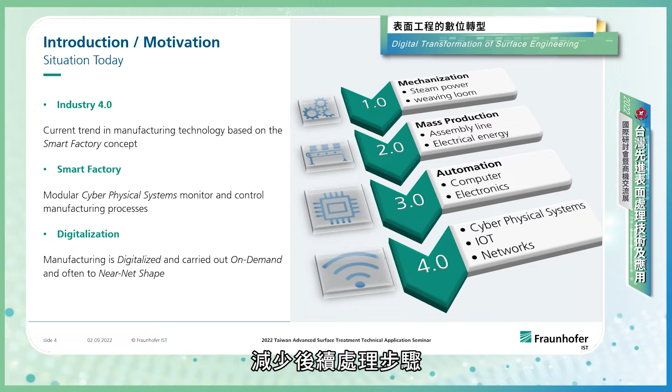How can we improve our manufacturing? How can we move to lean manufacturing? I would like to just quickly go through the 7 wastes of lean manufacturing. The waste is overproduction. We produce too much. We have to keep stock of all the material. We have huge warehouses that we need. There's a lot of transportation and movement between different places. We need people that access or process material or information.

We might have to wait on previous steps, on parts. We have to deal with defects. We have to sort out errors and mistakes and correct the problem, reduce and optimize. And we have to deal with overprocessing. All those aspects we can minimize, and then we can increase the added value and maximize the value. So removing waste adds value and improves the productivity.

What we want is to bridge the digital gap. We want to draw benefits from digitalization. We want to better utilize the assets that we have. We want to reduce dependency on tacit knowledge in manufacturing, in production. We want to reduce time and costs that are linked to product verification. We want to have on-site, in-situ quality control and verification.

We want to improve or visualize all the business metrics like yield, cost, delivery quality, equipment effectiveness, and so on. We want to enable and improve design for manufacturing and be flexible to act on new business opportunities. We want to build on a framework for developing a resilient business. We were talking about digital transformation.

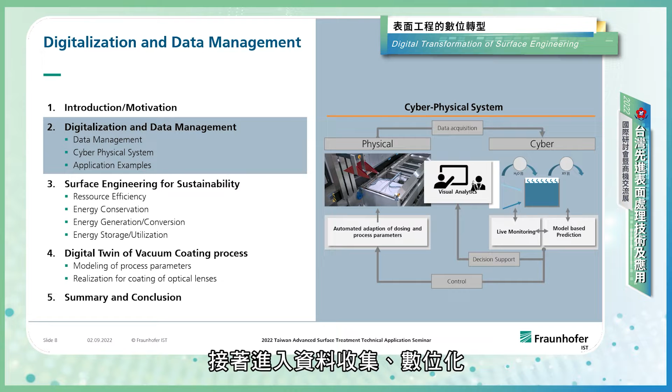And digital transformation is more addressing the mindset, bringing in the human factor, involving the human in the situation. Digital transformation is an approach to problem solving through technology. It's more about the people and their mindset than it is about the technology. It's using the latest, emerging technologies to build business. Collecting all the data, addressing aspects of digitalization and data management.

If we have a product, if we have a process or production line, we have our part, we have material that's moving within the plant between different steps. We have, for example, a pre-treatment that's creating a report. The next step would be a modification or a coating of our part, and then we do some quality analysis and we characterize the outcome.

We have different reporting, and the human is moving between the different steps and brings the information together and is correlating the parameters. But what we want to have is we want to follow the material flow and collect the data. So within the different steps, different kinds of information are generated in different file formats. Maybe we have structured data which is coming from the PLC, which are automatically generated files by the different systems themselves or relational databases. We have unstructured data like communication by mails, protocols with text editors, spreadsheets, and so on.

And the goal is to get all the information from the different processing steps, from the different sources into our database, to use some logging for the different processes, to use the information that we can access and bring it in the database to use, for example, AI, artificial intelligence, to feed back, to control the processes. We can visualize the results, we can analyze the results, and we can put it into simulation and modeling.

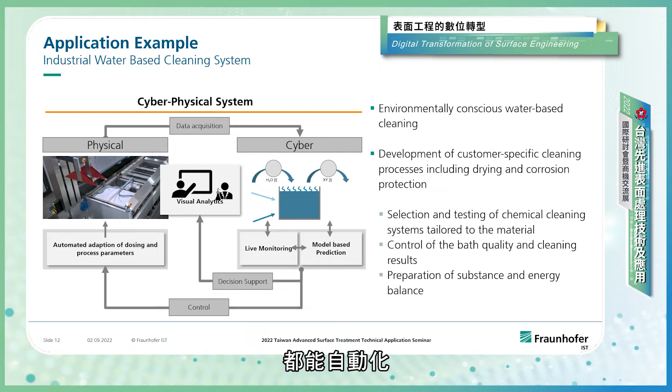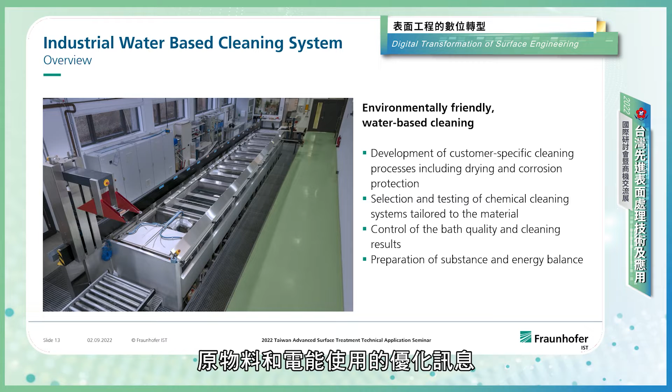This is a picture of our cleaning line with the different process steps that we have. And what we want is to develop a customer-specific cleaning process, including drying and corrosion protection. It's important to select and test the chemical cleaning system tailored to the specific material we are dealing with, and we want to supervise, we want to control the bath quality and the cleaning results, and we get information, we can prepare substance and energy balances and also get information about our CO2 footprint.

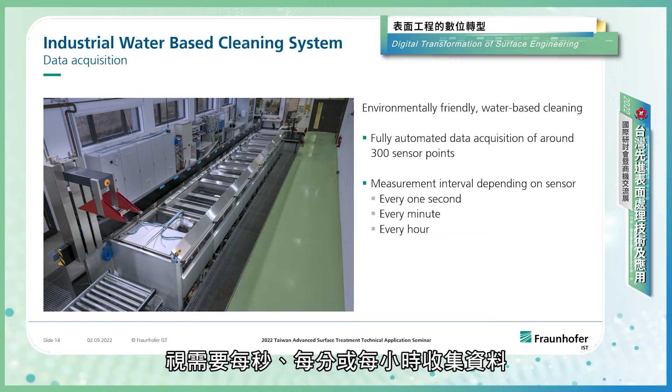In our system, it's a fully automated data acquisition with approximately 300 sensor points, and the measurement interval depends on the individual sensor, on the individual situation, and will be collected every second, every minute, or every hour as it is relevant or desired. This gives an overview of the dashboard on all the different stations in the system that we can monitor. We can see trends, we can see the development, and you get a broad picture of your process. And then you can zoom in.

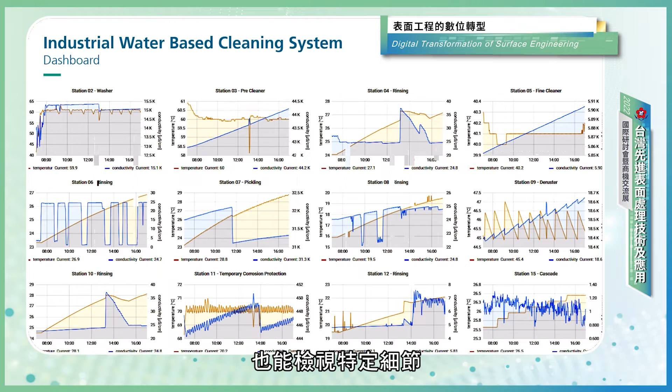Here you can see the temperature change when we enter with a massive part which is warm into a bath. We can see when we are entering the bath that we increase the temperature. There's a jump in the temperature because the part is heating up the bath to some extent, exchanging the temperature between the bath, the surrounding environment, and the part itself. And also it's influencing the conductivity of our cleaning solution itself.

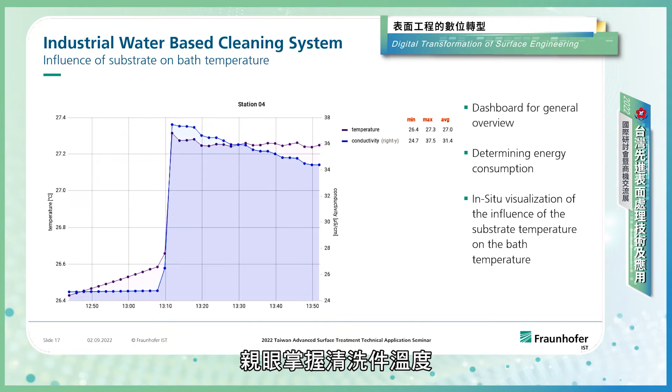And that's quite sensitive because this gives information on the cleaning agents, whether we have to recalibrate or to add some cleaning agents, but it's also depending on the temperature. So you can see directly the interaction between the baths in the process, and we get an in situ visualization of the influence of the substrate temperature of the bath on the bath temperature.

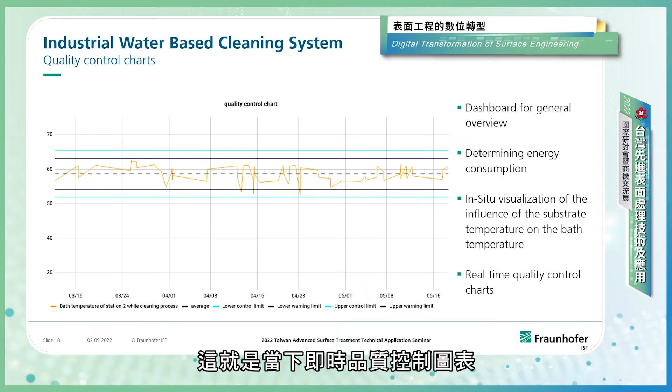We get quality control sheets on the long term. Here you can see an example over a period of 2 months, and you can see the energy consumption, determining the energy consumption. We can see the bath temperature. We have a corridor we want to keep in. We have a lower and an upper warning limit, and we have a control limit of our process, and we want to keep our process within a given boundary. And we have access to real-time quality control charts in that situation.

If you don't have new equipment that already has all the data, you also can retrofit existing equipment. So like we did with a coating system, a vacuum coating system that's shown here, we added some sensors, and we want to upgrade the system to get access to machine information, process information, and to get correlations between the process parameters and what's happening with the product, with the coating itself. So we want to correlate the production parameters with the coating properties finally.

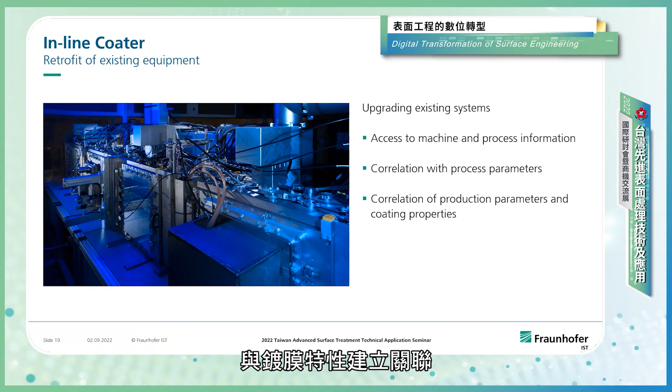One example here is for a given power. So we are operating in constant power. You can see on the plateau levels, there's a constant power set, increased in different steps, and the power was kept constant, and we are monitoring current and voltage. And what we can see are some of the overshoots here. This is some arcing of the process, some undesired events that we can see. We can monitor, we can trace back, and also correlate if there is some failure, if there are some issues in the coating.

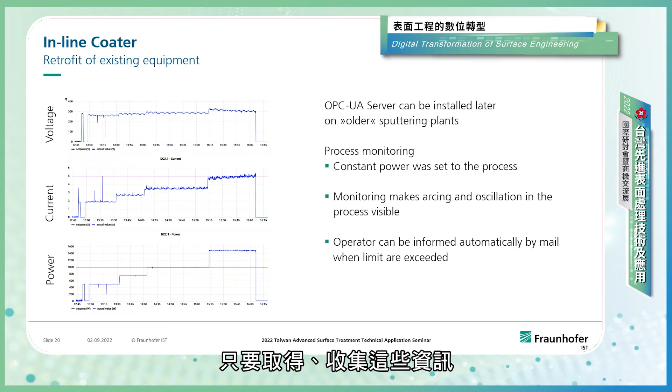Furthermore, you can see some oscillations on top of that, which is correlated to substrate movement, since our coating source is a cylindrical cathode, a tube that is rotating, and if there is uneven rotation, you see some deviation in the current and voltage signal. All this information you get, and you can collect it and improve your process with that.

A third example would be retrofitting older equipment. Quite often you have, for example, some analytical tools. In our case, we had a vibrating sample magnetometer to characterize magnetic properties of coatings, and we don't have access with that system to our intranet due to some security issues, and we can't handle the data directly. We are using a reverse proxy server that provides a web page to upload the data. So we have a spreadsheet, we can create some interface where we can upload the data, and this looks like the following.

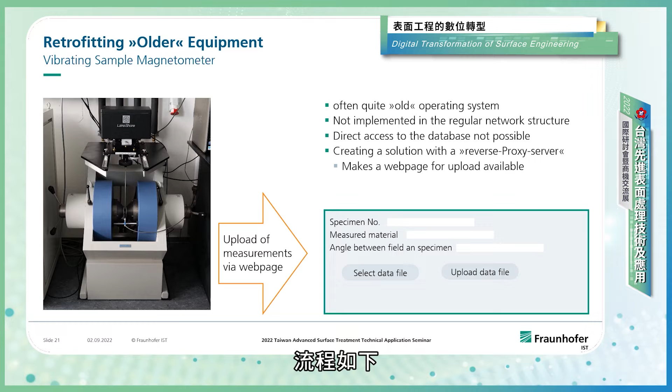We have an isolated system, our measurement tool with maybe an old program, an old computer, and then we have a small single board computer with an operating system that's always up to date and is used as a reverse proxy server. And by that single board computer, we can upload the data into our database in the intranet without running into conflict with any security protocols in our institute or in our production environment.

From our analytical system now, we get our measurement data, we get it via our reverse proxy, and we put it into our intranet, import the data into the database, and then we can convert it and read out the values, the physical values and the properties of our system.

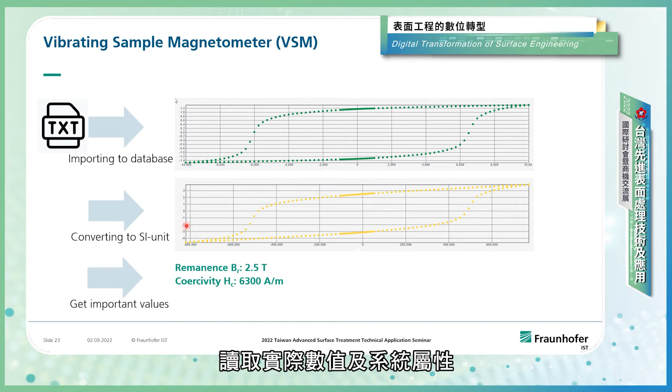We also can use other tools like Excel or other sheets and have some masks to get access to the database to read out specific data of our processes and our production, and then we can learn from this, correlate the data, put it into some algorithms and further improve and feed back to the system. And with artificial intelligence, we can run into a self-learning or improved situation, for example.

How can surface engineering contribute to sustainability? Coatings can significantly contribute to sustainability and efficiency. For example, addressing resource efficiency. We can conserve scarce material since we are only applying the material on the surface or the part of the surface of our product where it is really needed rather than costly bulk material.

We can address issues like energy efficiency. We can reduce energy, for example, in transportation by using low friction coatings, by reduction of friction, in aviation by erosion protection or thermal barrier coatings in gas turbines. And we can become and be environmentally friendly. We reduce toxic effluents, try to avoid critical chemicals and expensive disposal.

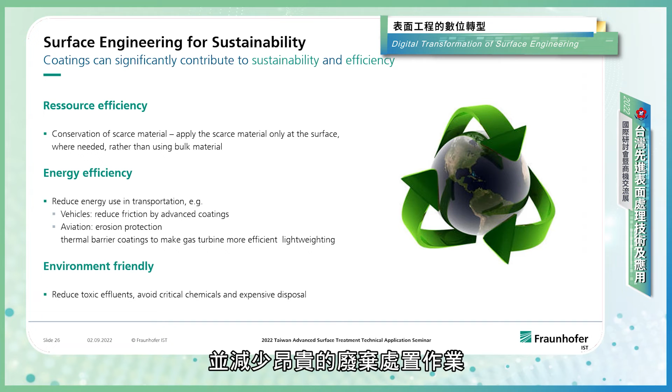In surface engineering or in vacuum processes, we are using thin film functional coatings only where it's needed. So we have only a small amount, a significantly reduced amount of material we're using. We try to substitute scarce or precious material. We have just thin films instead of massive parts, or substituting gold contacts, massive copper, and we go to a

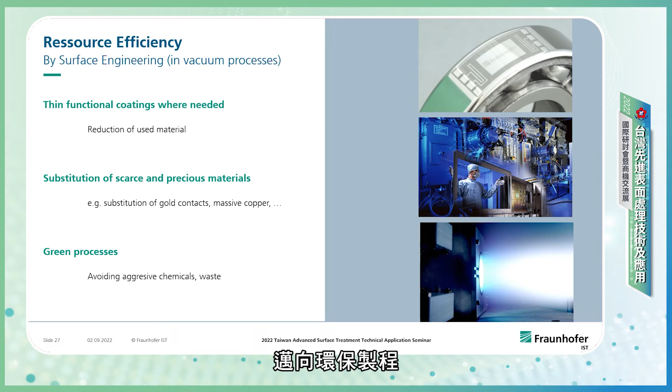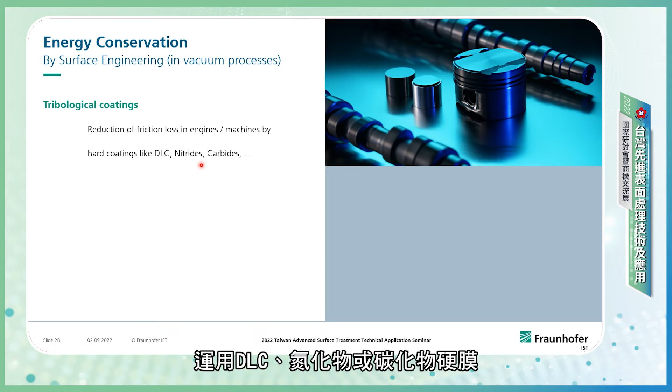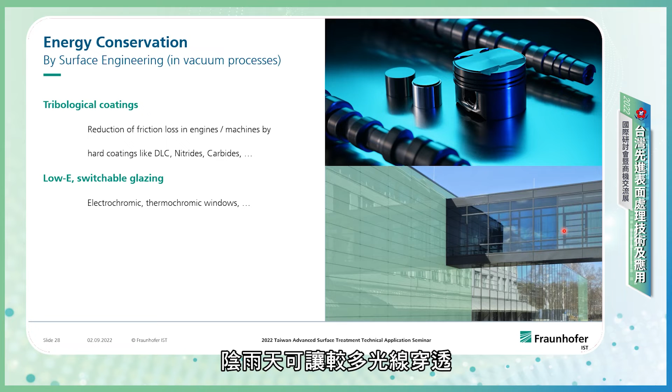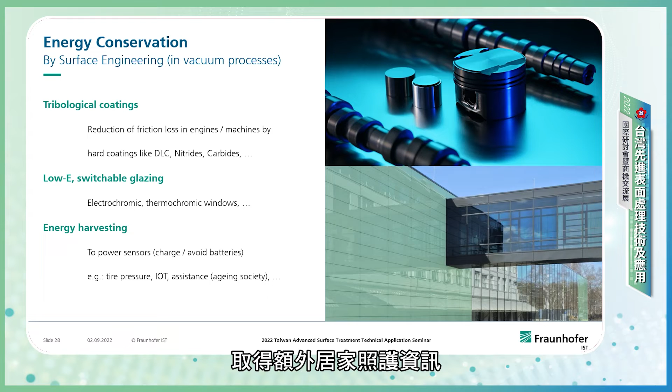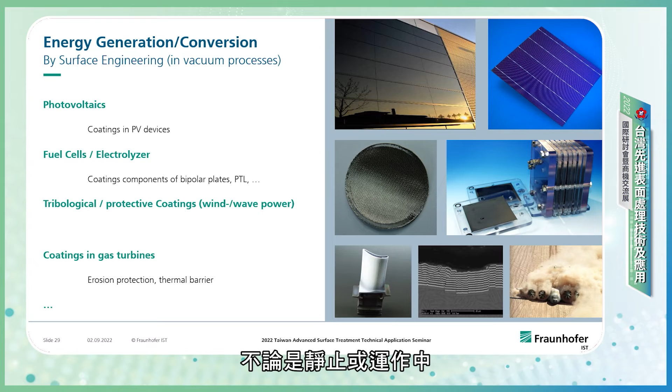We can generate or convert energy, like in photovoltaics with solar cells, in fuel cells, electrolyzers, having bipolar plates, coating of bipolar plates, porous transport layers, tribological or protective coatings, for example, for wind or wave power, in gas turbines, whether in stationary or mobile turbines, like erosion protection or thermal barriers.

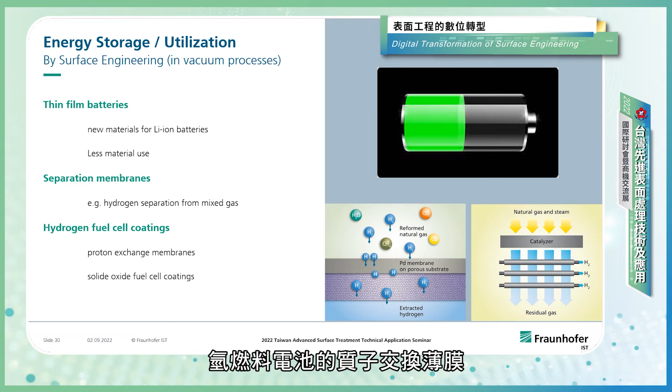We can store or utilize energy in thin film batteries to have new materials or less material use than in thick film approaches, to use separation membranes, for example, for the extraction of high purity hydrogen from mixed gases, or in hydrogen fuel cells, coatings for proton exchange membranes or solid oxide fuel cells.

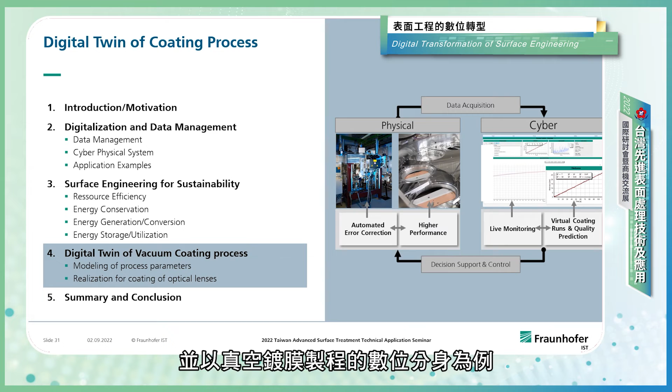And with that, I would like to combine aspects on the surface engineering and the digital data and the modeling in an example of a digital twin of a vacuum coating process. There are several simulation or modeling tools available in thin film technology. We have different kinds of material models, process models, and they are quite complex. So they consume a lot of time. Here somewhere is given the real-time limit. If we want to have a digital twin, we need real-time models. We need something that's acting in real time and giving the input.

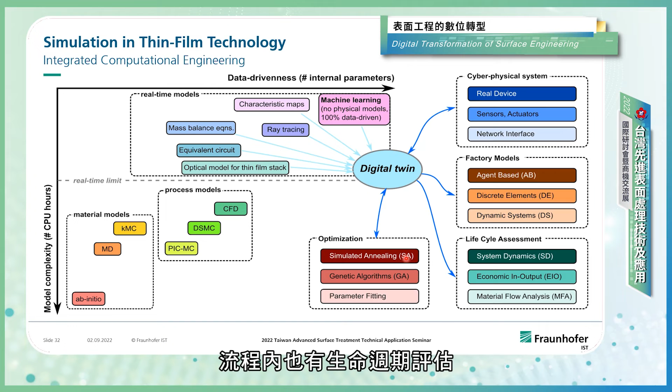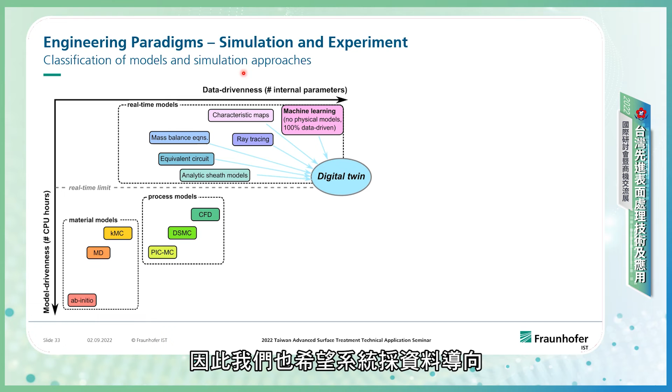We have cyber-physical systems that are connected with the digital twin. We have the real device, sensors, actuators. We have factory models that are connected. We have the life cycle assessment, and we have optimization in our process. Classification of models and simulation approaches that we have, like mentioned before. If it's model drivenness, we have a high amount of CPU hours. We need a lot of calculation time. And here we want to have a data drivenness in the system itself. So looking on the material and process models.

So for example, having the material models really on the atomic scale, having ab initio calculation, having the physical constants, having molecular dynamics, classical potentials using quantum mechanics. We have kinetic Monte Carlo, where we have activation energies that can be obtained by the molecular dynamics. Then we come to process models, where we have several particles, superparticles, collections of particles. We have particle in cell Monte Carlo, where we can already consider reactor geometry, electrical boundary conditions, cross-section, the different species or the operation conditions like pressure.

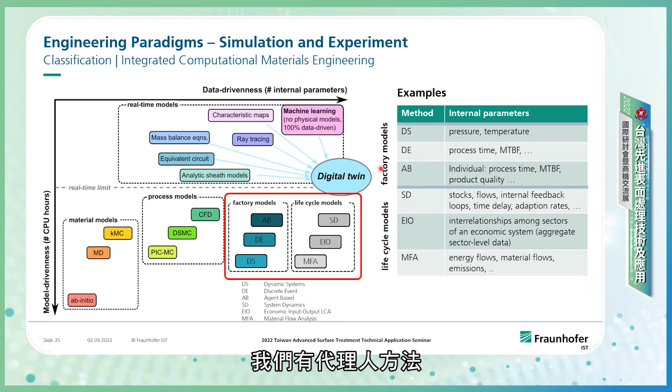We have direct simulation Monte Carlo, where we, for example, in a sputtering process, get information on the target erosion profile. And then we have computational fluid dynamics, where we can see temperature-dependent diffusion, viscosity, turbulence coefficients, and we can derive this from kinetic collision parameters. If we go to the factory models or life cycle models, we have the dynamic systems using pressure or temperature as an internal parameter. We have discrete events like the process time or the mean time between failure. We have agent-based methods, that's individual process time, mean time between failure, the product quality, and so on.

And in the life cycle models, we can address with system dynamics, stocks, flows, internal feedback loops, time delays, adaption rates. We have an economic input-output life cycle assessment, where we have an interrelationship among sectors of an economic system. And we have material flow analysis, where we can get energy flows or material flows and emissions. And we want to put this together.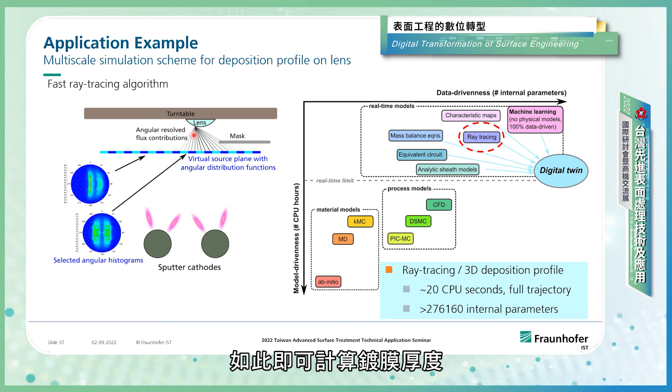In our case, we decided to go on with ray tracing. We have a ray tracing for a 3D deposition profile. Here we have our turntable, a big disk, a big table that is rotating, and the lens is mounted on the lower side of the turntable. We have some sputtering sources indicated here with the circles, and the areas here indicate where the material is distributed, so we will have some material coming from down here up into that area. There is some masking to more homogenize the coating distribution, and the table is turning all the time. We provide selected angular histograms for each position and can trace it back, and by that we can calculate the situation for the coating thickness.

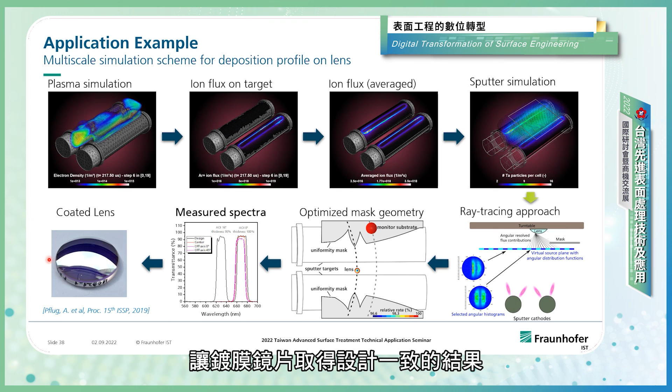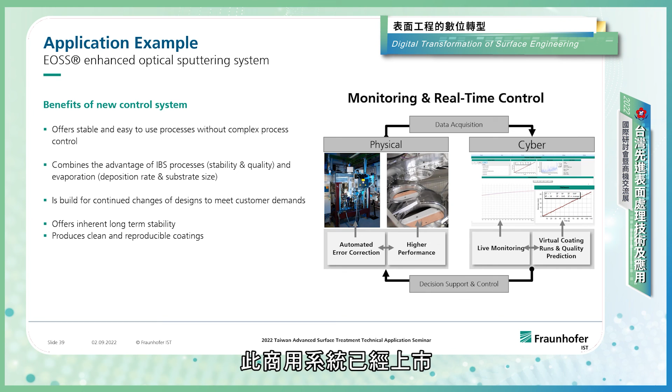Coming to the conclusion, we are living in the time of Industry 4.0 and digital transformation today. We have to learn, sometimes we already have learned, how to handle big data, so we can digitalize all parts of our production equipment and use that in surface engineering. There are several aspects and solutions for enhancing sustainability. We can create, by combining digitalization, combining the virtual world with the physical world into a digital twin, a system which is in real time, fully automated, and sustainable for production.